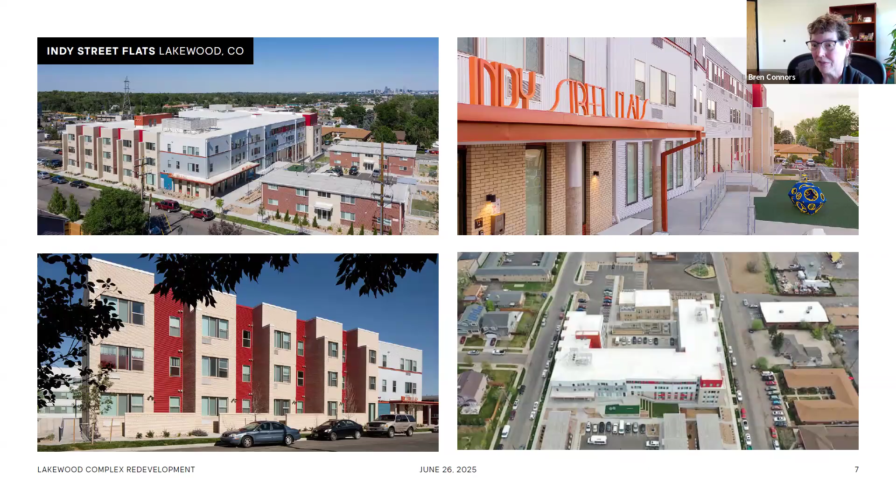You can't really see it, but this was a Masonic lodge that the Masons combined with another group, and we bought that and did adaptive reuse, with some micro units in there. So kind of an interesting combination of things.

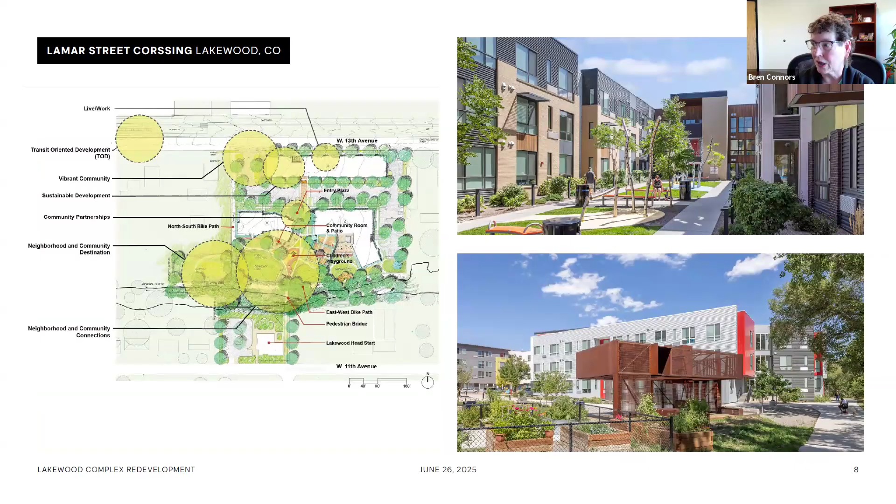Our Lamar campus is by the Lamar station of the light rail. It was built in 2 phases, and it's a total of 175 apartments for families. The architect we'll be working with on the P3 site is the same architect that did this Lamar Station development.

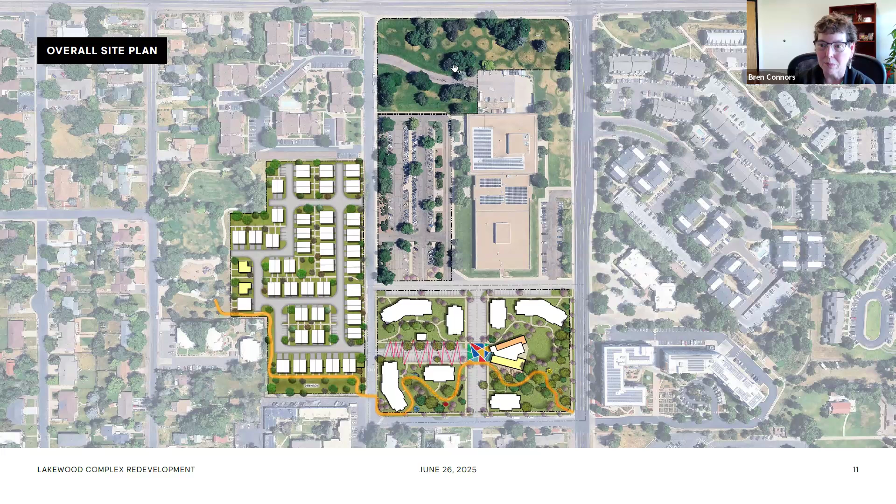So our vision for the campus - we talked a little bit about this, but if you're familiar with it, this is the building, the parking that will be a flex parcel. Parcel 1 is going to be the rental piece that Metro West will work on, doing a low-income housing tax credit development. Parcel 2 will be the Oakwood Homes Elevation Community Land Trust parcel. Parcel 3, at the moment, we don't have plans, so we'll be working with Tom and Suzanne and the group on how to flesh that out and what makes sense there.

Amy, do you want to talk a little bit about the community support and partnerships we've developed? Sure, yes. Metro West has been working in the community for a long, long time, and really has great relationships with the Rocky Mountain College of Art and Design and the Arts District there, which you'll see in a second how we plan to integrate the art walk throughout the community and really use that as a thread to connect the for-rent and for-sale parcels.

We were proud to get a letter of support from the Jefferson County Community Network, which is a group of folks around the whole county advocating for more affordable housing. And I think that's, yeah, who else do we have there?

The West Colfax local business improvement district and business association along West Colfax has really shown a lot of local strong support. When I was at the WCCA meeting, which is the West Colfax Community Association, last week, I let them know that we were selected. Oftentimes affordable housing is not the thing that people are happy to hear is coming, but this group was just thrilled that we were selected. They are so excited to see this development come to this area.

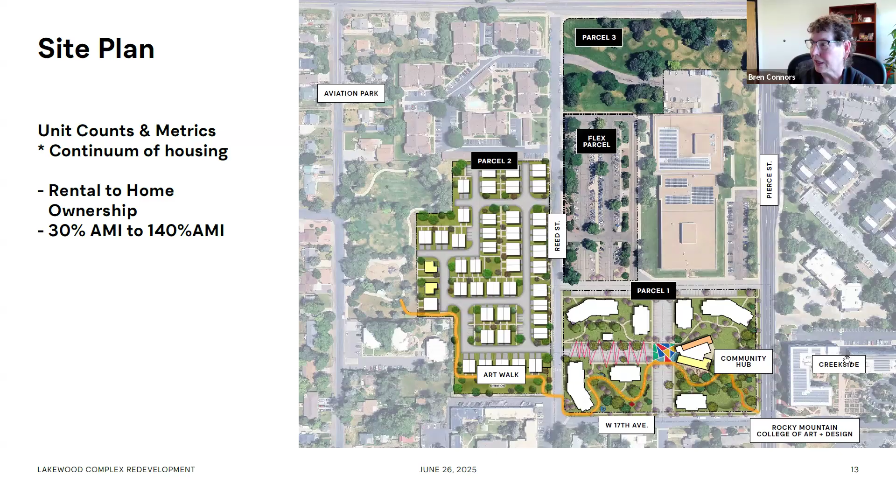To zoom in a little bit more, I'll talk about parcel 1 and what we're doing there. Right now there are a lot of mature trees on the site, and it has very much a park-like feeling to it. The city, people in the city, really appreciate that and the trees. So we have met with the planning director about trying to preserve as much as possible of this tree canopy and kind of open feel to the space, and he is a strong supporter of that.

So we would be doing multiple buildings of the 3-story walk-up product, and then a community center that includes our offices and workspace along with some childcare space.

So we have been working with Jefferson County, and they're going to provide some technical support and hopefully maybe have access to some funds that we might be able to tap into. Also, they'll work with us on selecting a childcare provider and making sure that they are able to operate and run well.

We also are working with the Arts District there, in real need of artist studio space. They own a building that they rent out spaces in, but that's one thing they asked, could we incorporate? So we're going to try to do that, and they've agreed to manage those spaces for us.

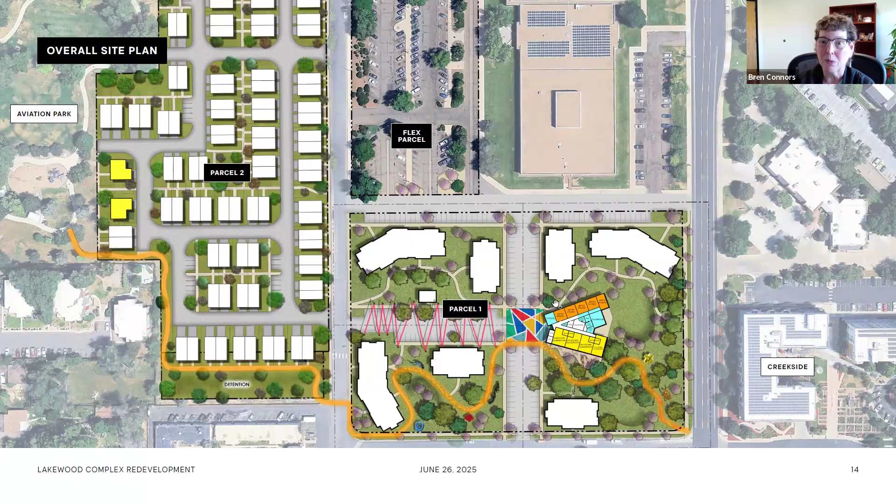And we've been wanting to try to get childcare for a long time, so this is a great opportunity for us.

So just a little bit more detail about this. This corner is right now the art walk, an art loop that 40 West has done. It's maybe like a 3-mile walk, I don't know. Anyway, so this corner has the art walk on it, and it's again across the street from our Creekside development.

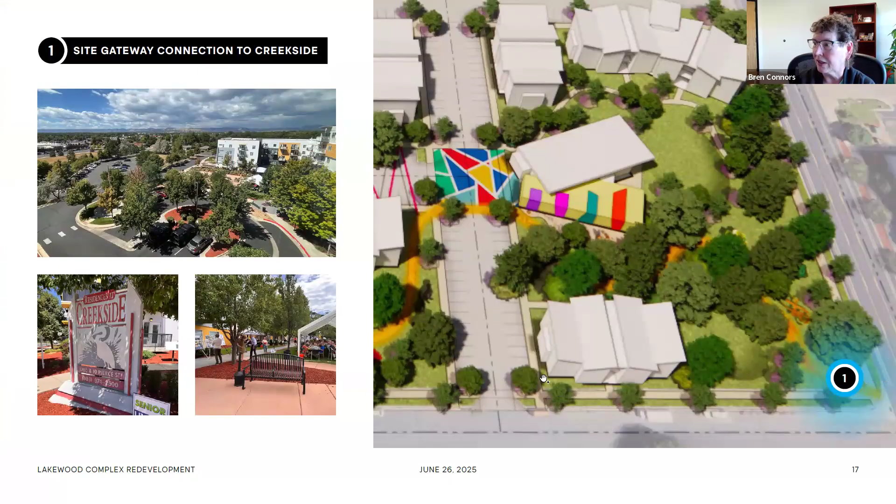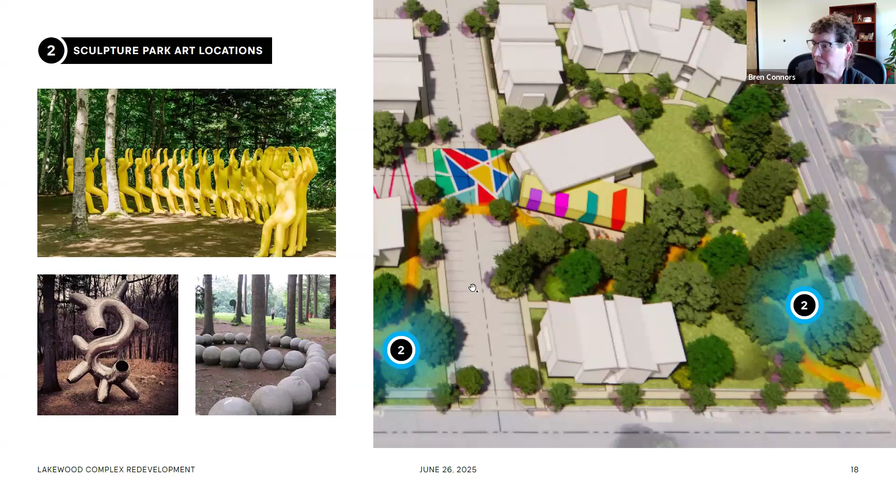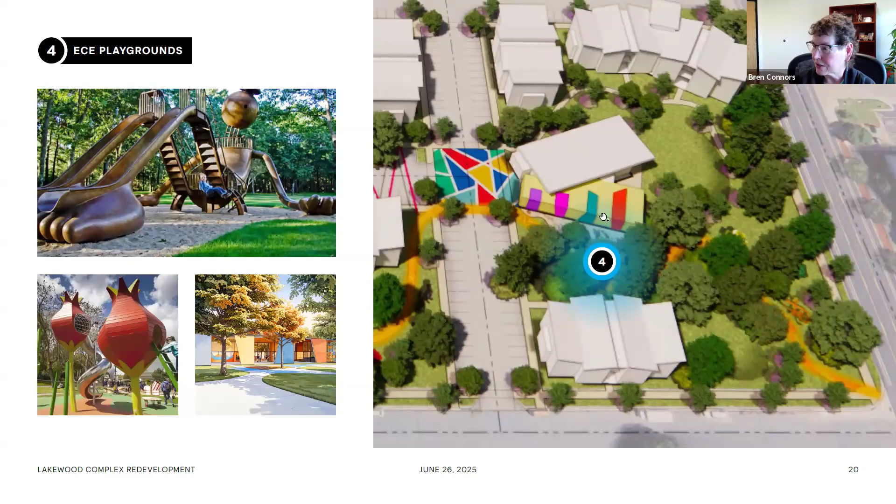Again, we're keeping the tree lawn, if you will, in here. These are just some ideas of sculptures that our architect found images of, again keeping the outdoor feel while still being in the city. Some more connection — this isn't necessarily what the childcare will look like, but we thought if we could have the outdoor space for the childcare really incorporate the woods and the forest in there. The artist studios will also have outdoor space kind of to the north, which I am not an artist, but my understanding is north-facing studios are great for artists.

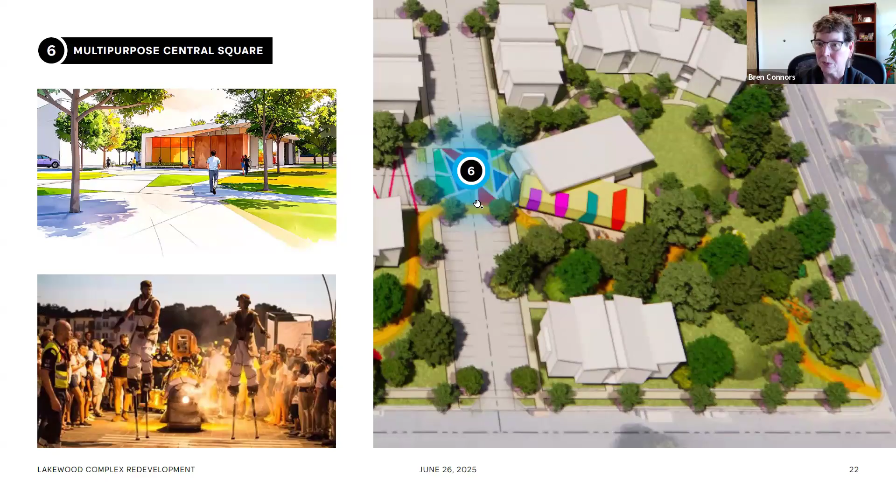We talk about this as kind of a central square, right outside of the community center, where we might be able to have activities happening at various points with the arts district and our staff. And then the connection over to the Oakwood Homes site, kind of a promenade or plaza to connect us over to the park.

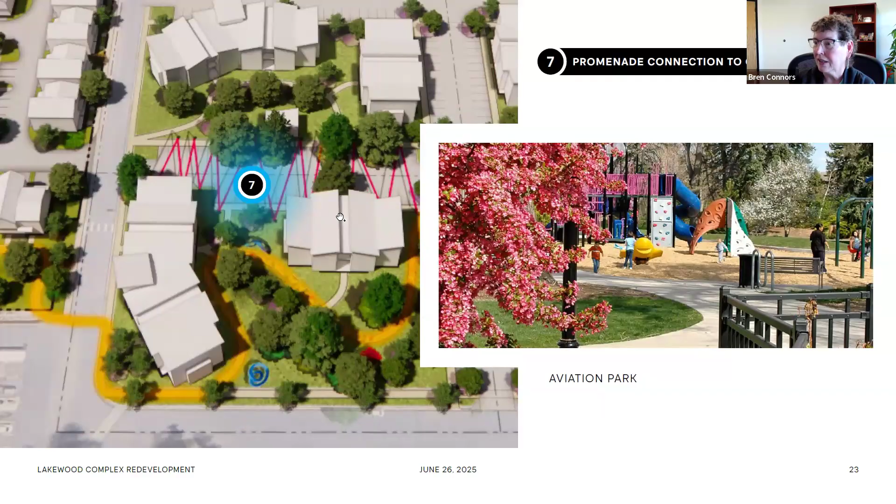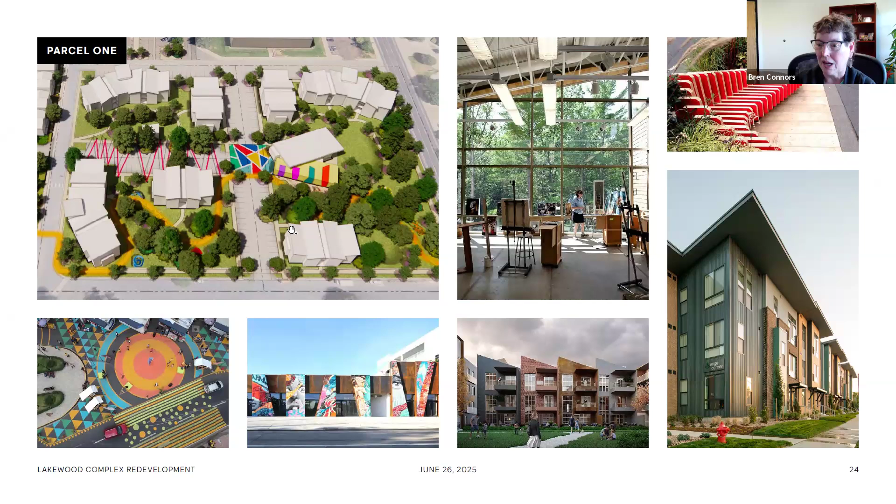And again, just some images of how that connects, different versions of what 3-story walk-up buildings might look like. And I will hand off to Amy to talk about that parcel.

And we've been in conversation for well over a year with Executives Partnering to Invest in Children. I'm a founding board member there. It's a statewide organization working to increase early childhood access across the state. They are going to be providing technical assistance for us and have been on this idea.

We've also been talking to a real estate investment trust about purchasing those homes and leasing or renting them to the childcare providers until the provider's business is financially feasible for them to take over the mortgage. So we love that idea, and we've been thinking about it for a long time, and we're just very excited to have a project where we can actually

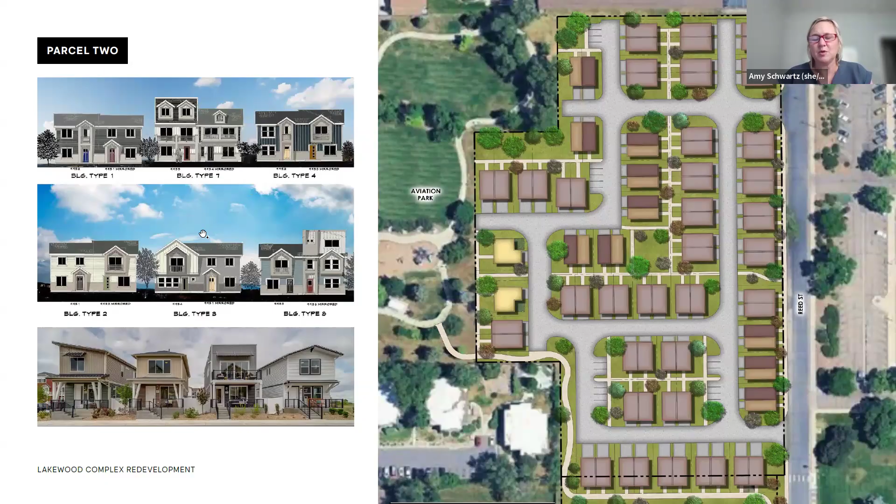And I think that's about 16 to 20 or something like that. Is that right, Amy? Yes, based on the kind of middle land price we included. So a little bit more work to do there to finalize what the acquisition price will be and how that relates to the ratio of permanently affordable home ownership versus market rate.

But I think this price point has not been delivered in the city of Lakewood for 20-plus years or so, and that was a really compelling point for all of us. That's what we heard from the city planner as well.

Yeah, anything else? Great questions. Well, thank you guys for presenting.